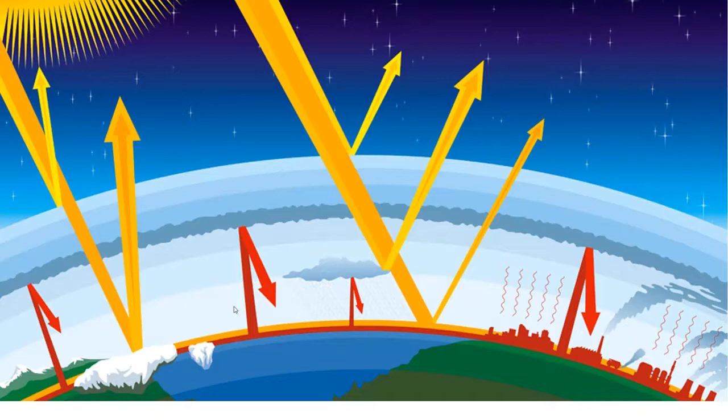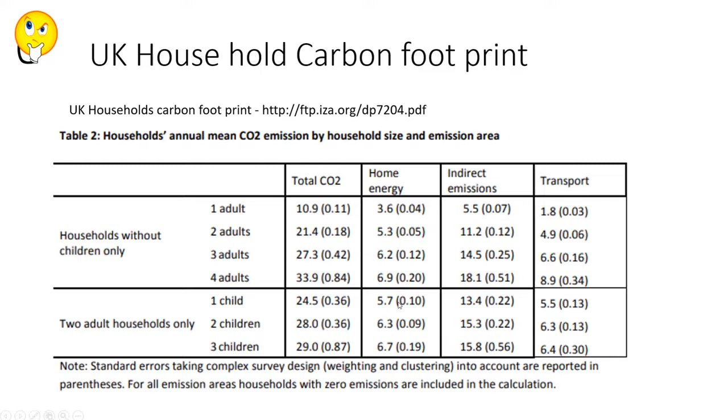So here is some data that I got from ftp.iza.org from a guy that did some research, and he is estimating that households produce about 3 to just shy of 7 tons of CO2 emissions a year. But the problem with this is basically that it's invisible, and because it's invisible, people aren't really driven to do anything about it.

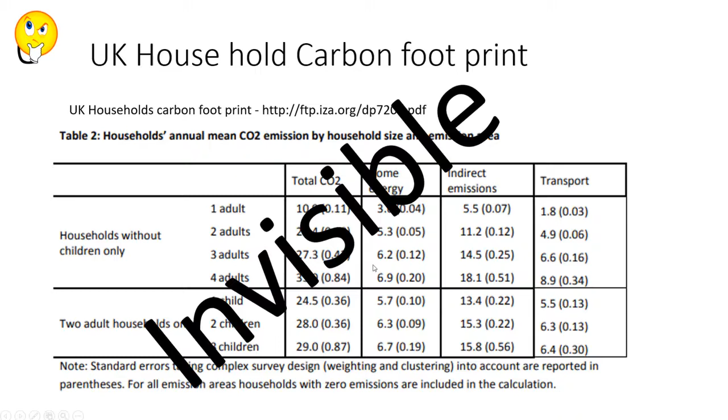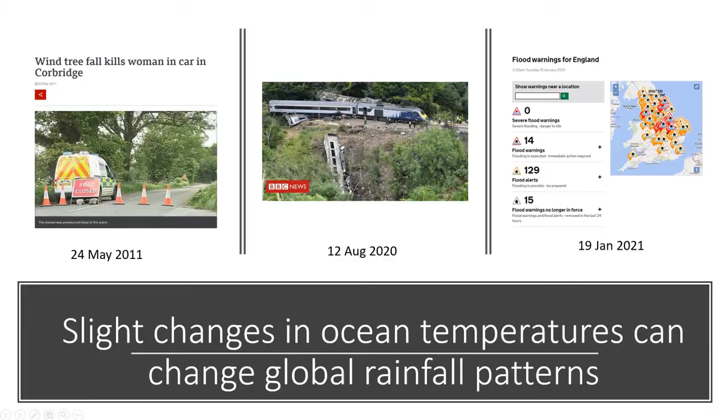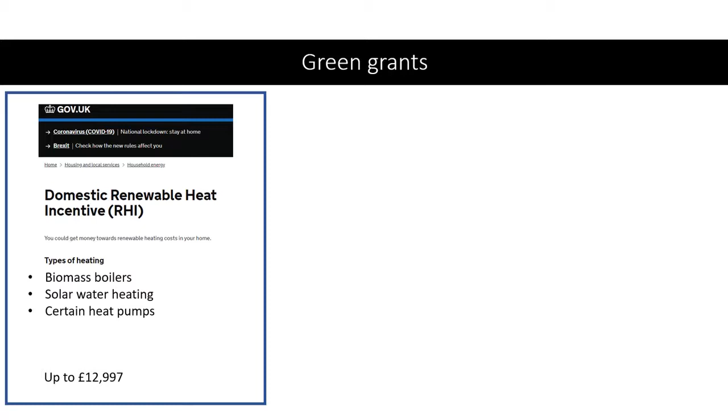So what green grants are available? So there's two. There is the domestic RHI, renewable heat incentive, and that is a grant up to 13,000, which will cover biomass boilers, solar water heating, and certain heat pumps. And there is a second grant, which is the Green Homes grant, and this allows you to make further energy improvements to your home. And I include the 2 links to their websites below.

For the Green Grant, there's a maximum of £5,000. It's actually £10,000 if you're on benefit. This is organised into 2 measures. Firstly, you need to install a primary measure, which will either be insulation or a low carbon heat solution, which was mentioned before in terms of a heat pump, biomass boiler, or solar heating. And then from that, you can install secondary measures such as double glazing and doors and heating controls and insulation.

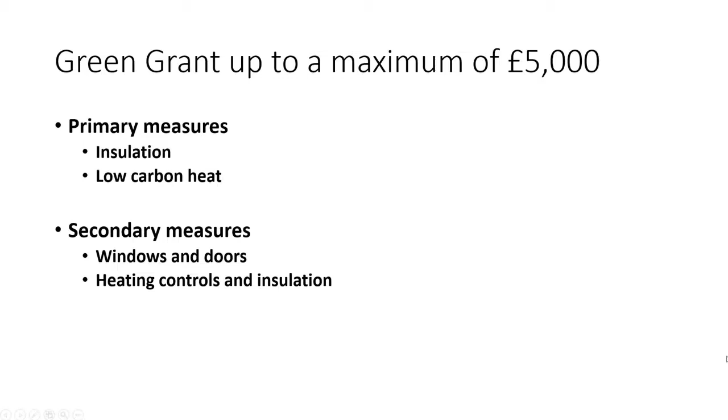Basically, if you join the scheme and you follow its rules, then you actually get the money back over 7 years. That's certainly for the renewable heat incentive, which is up to 13,000. The Green Grant, 5,000, is basically a voucher to that amount.

And one of the other considerations in terms of switching your heating is hydrogen heating, which is certainly an option. So I've got some thoughts around it here. Effectively, it's going to take too long. The Guardian ran an article indicating it would take something like 700 years to reach low carbon heating under the current plans. They're an alternative, but it would be too long in terms of how long it would take to roll this out. And really, the CO2 reductions are needed in this decade.

The other issue is with hydrogen, although it's clean, one of the issues is the production, and some plans are looking to create the hydrogen from the gas that we have, and that means that by taking hydrogen from gas, this would actually also create carbon dioxide, which will be captured at source, but there's an issue around how that would be managed.

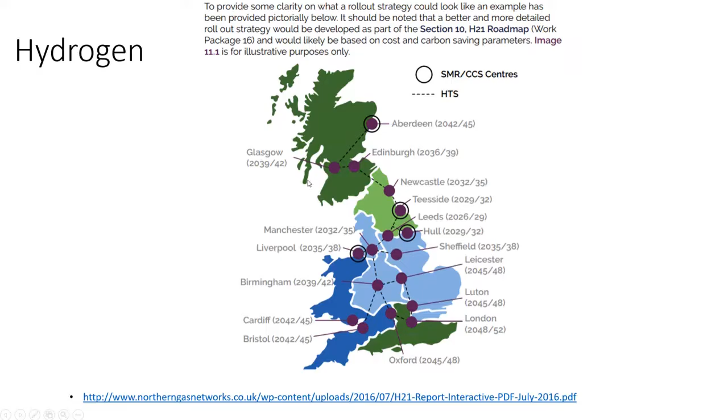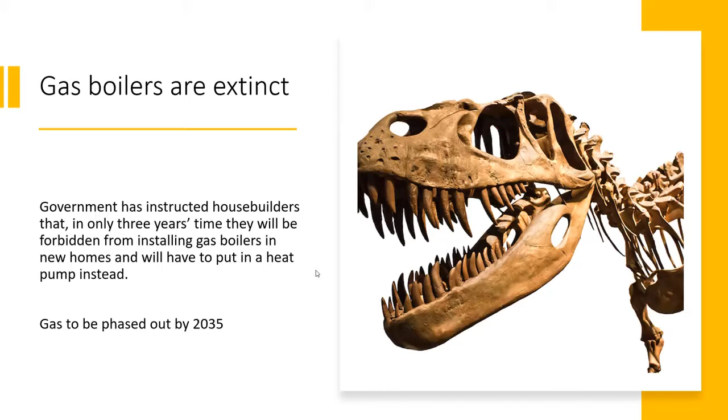So the main part of the talk is achieving carbon net zero by switching to an air source heat pump. So certainly gas boilers are going extinct in 3 years' time, in 2025. Builders won't be able to install them into new houses, and also gas will be phased out by 2035. So there is a short 4-minute video that really does well to explain what an air source heat pump is all about.

There's more than 27 million homes in Britain, each one using energy all day, every day. Nearly 3/4 of that energy is used for space and water heating. As a country, we spend £13.5 billion a year on heating our homes. That's a huge amount of energy.

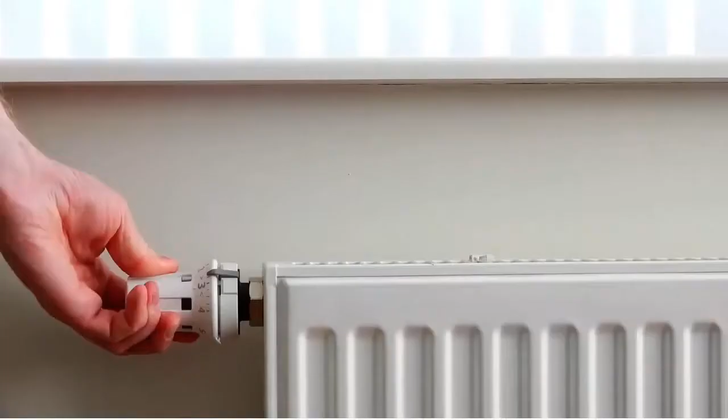With the rising cost of fossil fuels like oil and gas, it's no wonder millions of families are looking to reduce their heating and hot water bills. But more worryingly, rising fuel bills are pushing some households into fuel poverty. The technologies we've used for years also produce too much carbon dioxide, which is something the UK government want to change to help us meet our climate change targets.

We simply can't keep using oil and gas indefinitely. We have to switch to clean, renewable energy sources. Now, the good news is there's proven technology already being used in thousands of properties throughout the UK. It's a renewable, super efficient and affordable solution, but it's one that you might not have heard of.

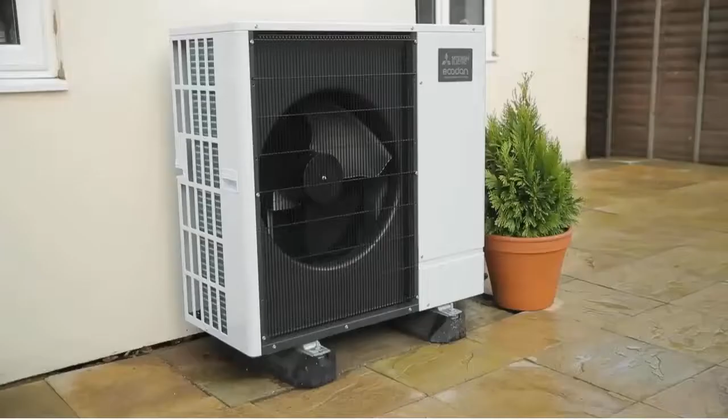It's called an air source heat pump, and I'm here at a property near Milton Keynes to take a look at the latest EcoDan design from Mitsubishi Electric. So this is it, the EcoDan air source heat pump. But what is it? Well, I can tell you, you've been using the technology for years in your fridge, only this works in reverse. EcoDan sits outside in the garden or down the side of your property and just needs electricity and water connections to work.

It takes free renewable heat energy from the air and upgrades this to provide all the hot water and heating your property needs, even when it's freezing cold and there's snow on the ground. EcoDan is designed specifically for UK homes and works at temperatures as low as -25 degrees Celsius. This ultra-quiet model can be installed under UK permitted development regulations, and because of its low sound output, it can be positioned virtually anywhere in a garden, making it neighbour-friendly.

So what makes air source heat pumps so good? Well, it's all about energy efficiency. For every 1 kilowatt of electricity it uses, it can create over 3 kilowatts of heat energy, making it 300% efficient. This is called coefficient of performance, or COP for short. Compare this to oil and gas, which at best can only achieve a 90% efficiency, and you can see just how efficient air source heat pumps really are.

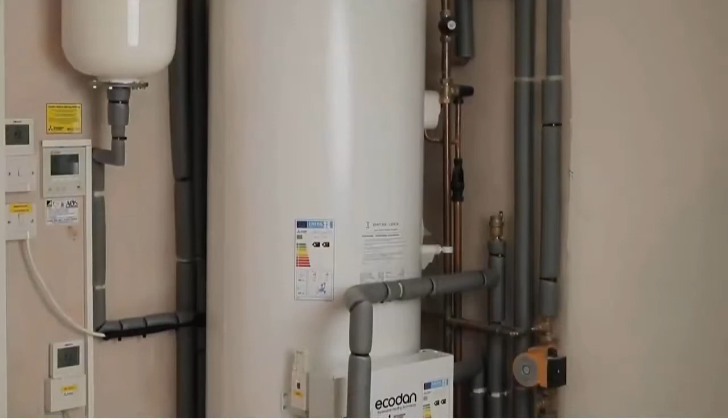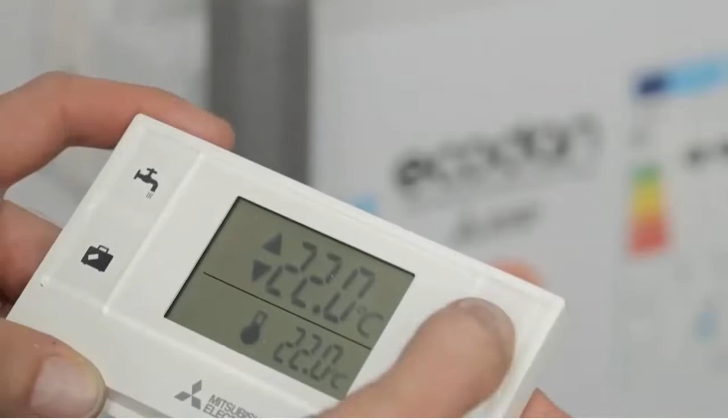Unlike other heating systems that give big pulses of heat into your property, the EcoDan maintains a constant ambient temperature throughout your home, so it's always cosy and warm. This makes it ideal to use with any type of heating system, such as underfloor heating or traditional radiators. Let's have a look at the hot water cylinder. Now, just like conventional heating systems, EcoDan works with a cylinder that distributes the hot water throughout the house. It can be controlled by wall-mounted displays, handheld remote controllers, or even via an app on your smartphone.

Air source heat pumps are classed as a renewable technology, so they qualify for payments from the Renewable Heat Incentive, the UK government's financial incentive to promote renewable heat. For an average 4-bed semi, you could expect to get back over £7,000 over a 7-year period, so it virtually pays for itself. Mitsubishi also offer an optional metering and monitoring service package, increasing payments by over £1,500 over the term of the RHI, giving a total income of

£8,500. Accredited EcoDan installers have fitted thousands of EcoDans in the UK over the last 10 years, so it's a tried and tested technology that's clean, efficient and low maintenance. The great thing about this technology is that it can also work in conjunction with other renewable energy solutions, like the solar panels behind me.

So if you're using oil or LPG to heat your home, the benefits of installing an air source heat pump really do stack up. You can add an EcoDan, or even better, replace your current heating with one. There's no smell, no risk of oil theft, no price volatility or inconsistency of supply. It's a clean, low maintenance proven technology, and with the government's renewable heat incentive payments, it will virtually pay for itself. You can save money on your heating bills while reducing your carbon emissions too. But more than that, you'll be future-proofing your heating for generations to come.

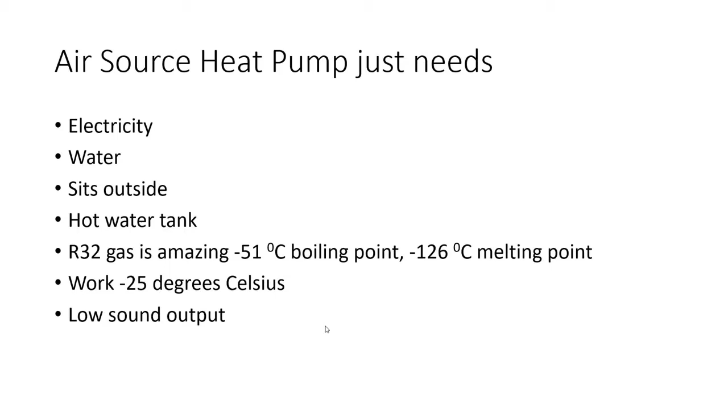So, now that you've seen the video, air source heat pumps. So basically the air source heat pump just needs electricity, water, sits outside, there's a hot water tank. It uses a gas called R32, which has a boiling point of -51 degrees C. Effectively, that is used to extract heat out of the outside air. It can work down to -25 degrees, and it has a very low sound output.

Yes, it's 300% efficient. So when you compare that to the best of a gas boiler, it's 3 times more efficient than a boiler. So effectively, for 1 kilowatt you put into it, it generates 3 kilowatts of energy in terms of heat.

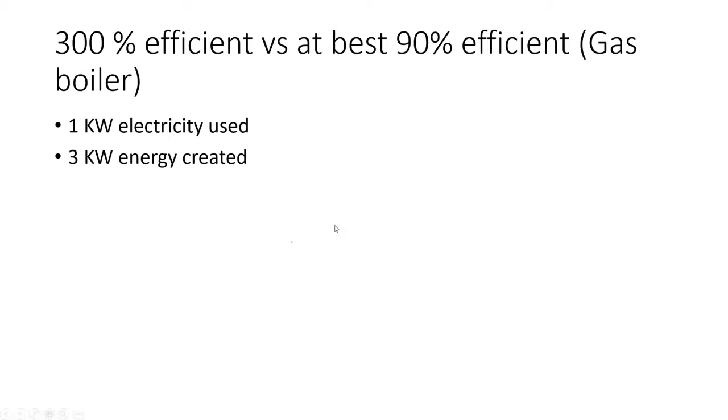So what are the benefits? It can reduce your heating and water bills. You'll have 0 CO2 emissions, and if you use a green energy supplier, then certainly that will ensure that the electricity you're using is green also. It's paid for by the government, so paid back, so you get the money back over 7 years. It's renewable, and it's really efficient.

Read the essential guide. So just read the guide. It also talks about whether you need metering, and I have opted for metering. This is basically that data is collected about your energy use, the times that your heating's coming on, how much energy you are using, and this is collected and then helps electricity providers plan energy flows across the country. So you get paid something like £1,600 if you allow your data to be collected.

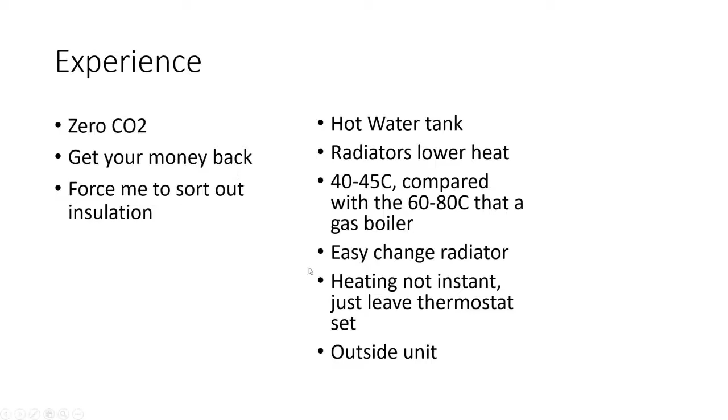The heating is not instant. In the morning the heating comes on and the house will get to temperature, and then the house will slowly come out of temperature. So you can't blast it like you can do with a gas boiler. It takes about an hour or just over to get the house to temperature. And then also you do need somewhere to sit the outside unit, which is where the air source heat pump will sit.

So if I put that all together, I'm getting £440 per quarter from Ofgem for my air source heat pump, and then with my loan, if I went for the post office loan to pay for it, I would have paid 532. So in effect, I would only be down slightly, £91 per quarter. However, I would be making savings, so that's probably actually zero. When you equate that down, it's actually £30 per month that I'd have to contribute. But if I'm making savings, that would be zero. And for that amount of money, where you've got all the money back over 7 years, that's a reasonable price to pay to go carbon free.

So what about more help in terms of doing this? I would recommend that you get lots of quotes from as many suppliers as you can, maybe between 10, 20, 30 if you could. One website to use is renewableenergyhub.co.uk. You can search for installers on that website. You can also search on Simple Energy Advice installer search, and that provides some others. And you can also use Trustmark, which is a government website where the suppliers have to gain Trustmark accreditation, and then they can be listed on the website. So use those three to contact suppliers.